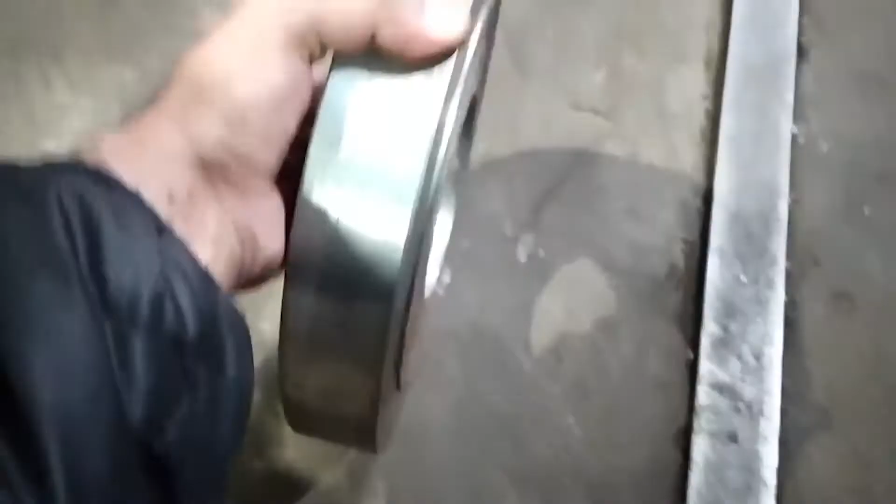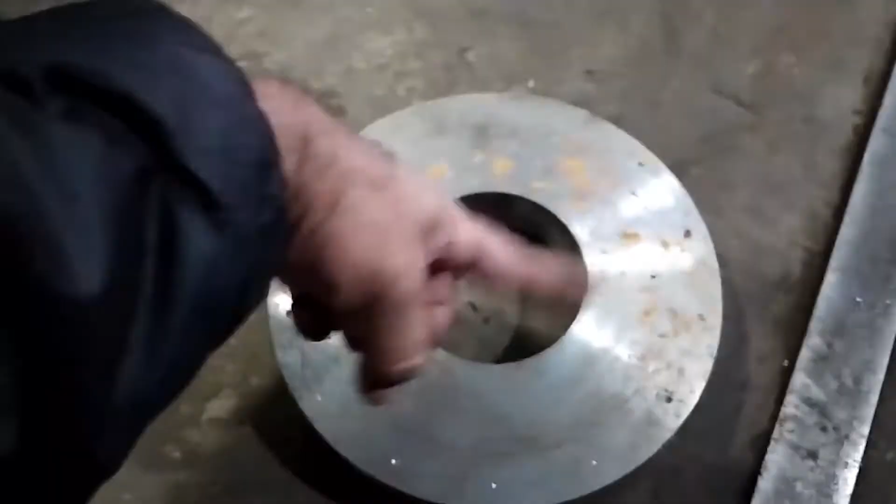Let me show you what type of job we are going to work with. This is a circular job, and we are going to perform center drill and area clearance operations inside of it. This is the thickness of our job, and I'm going to put this job on the bed.

After that, I'll show you how to produce G-M codes using CamWorks inside SolidWorks. I'll place this specimen like this, and let me show you inside the computer. This is the output we want from the VMC operation - at the center we are going to operate area clearance, and as you can see, I have already set machine, stock and coordinate.

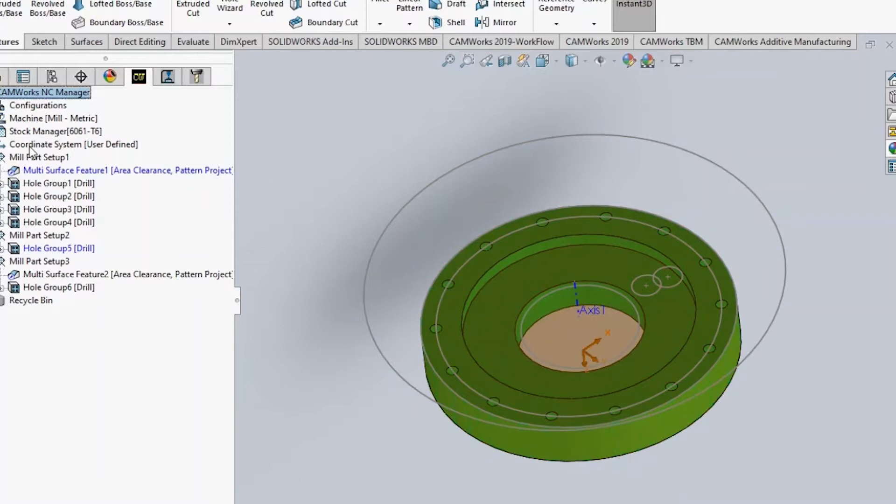If you have seen my previous video, you can check that video on how to do that. In order to create a mill part setup, you can go to CamWorks and setup, and this way you can create your mill part setup. In this area you can create your operations.

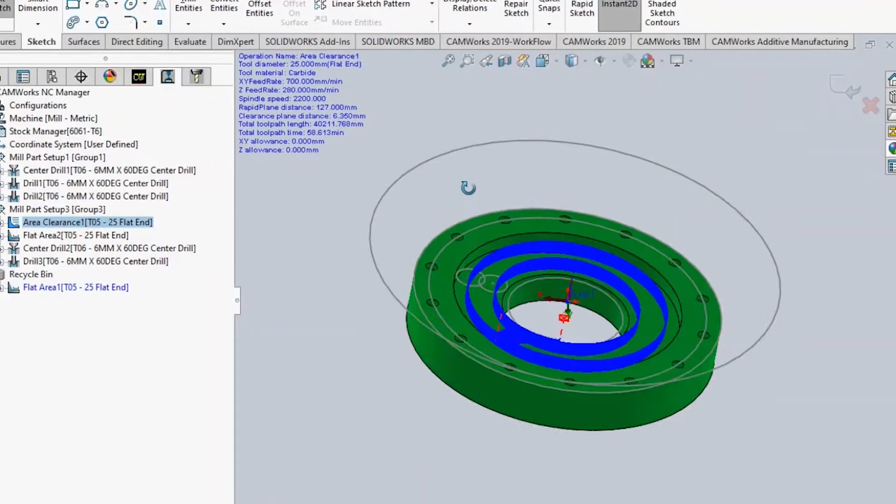Under mill part setup 3, as you can see, this is the area clearance, and we are blocking the tool from going inside this bore. Let me show you how we're going to do that by going to edit in the area clearance. Let me show you the settings that we are using.

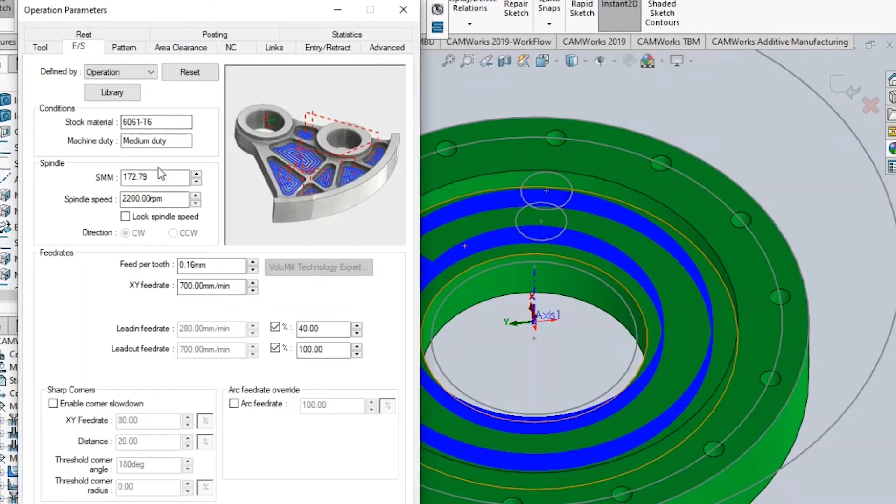This is the tool we are using to do area clearance. If you know all the parameters of your tool, you can enter that. Under feed speed, you can enter all this. Under pattern, I'm using pocket out, and this is the maximum and minimum step over.

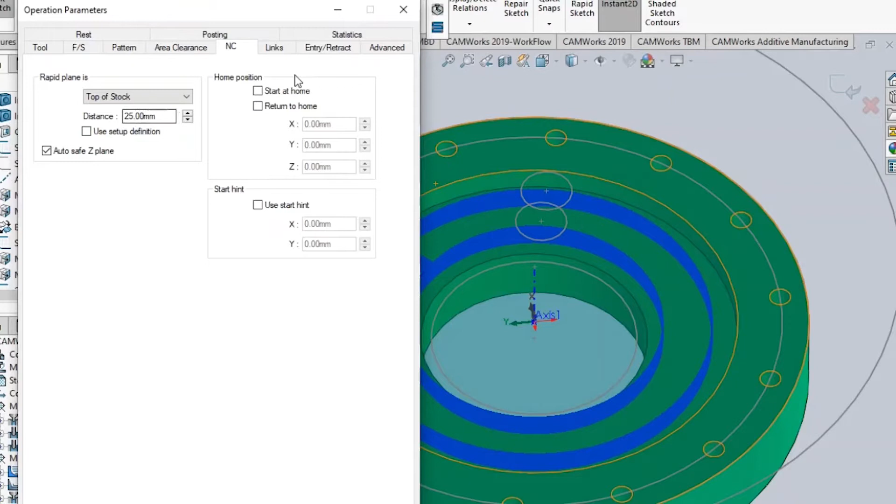Under area clearance, I'm going to use 0 because I have already moved the face up to which we want the clearance, so manually I'm not going to install any allowance. So 0.3 for cut, and for NC I'm using 25. These are the default values, to be honest with you guys.

So I'm going to use by level. Under the entry level, I'm going to use ramp, 1 and 2 degrees. That's all - I'm going to leave these values as they are.

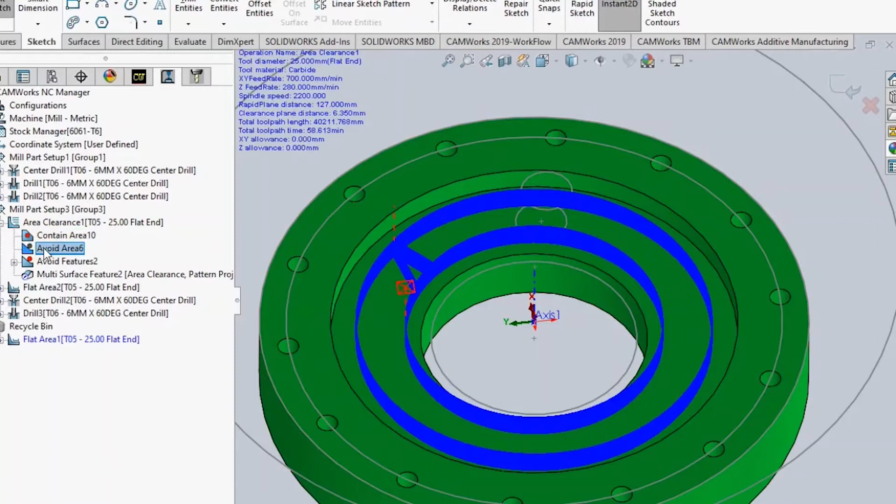Let me show you the contain area. The contain area is nothing but the area under which the tool is going to operate, and the tool is not going out of it.

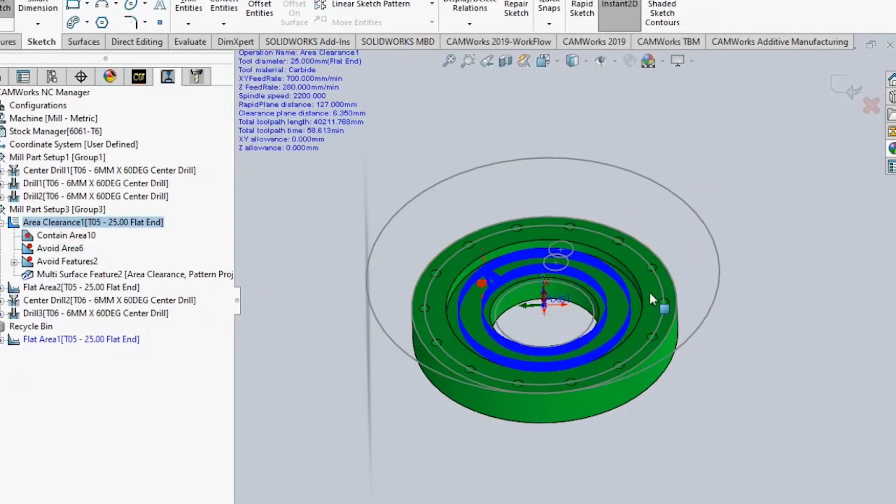So this is the contain area, and now is the time to show you the avoid area. The avoid area is the area in which the tool is not going to enter, no matter what. This is how I get a result like this.

Let me show you the center drill operation over here. This is the center drill I'm going to use. Let me show you the settings I'm using for this operation.

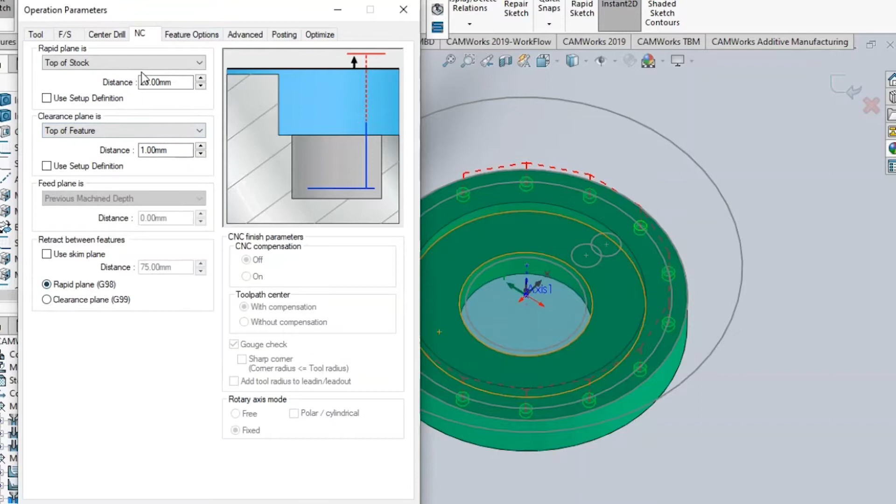Under feed speed and under center drill, I'm using spot drilling. So it's only one go, and everything is by default - I'm not changing anything over here, like this. I'm going to leave it as it is.

You can change the start point wherever you want. So after processing, you can get this. This is the drill operation, as you can see under the settings.

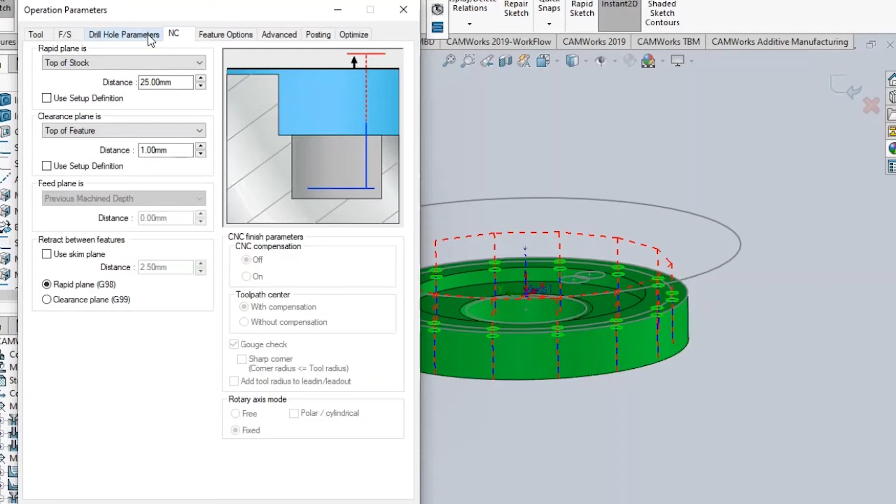Let me show you some changes. Under the peck setting, it is by default, I guess, 2 millimeter, and under the NC I'm going to leave everything. Let me change the value for you guys if you want to know how to change the peck value.

This is the Q value under the G-M code. This is the 3 millimeter peck I'm using, or the Q value. I'm going to leave everything as it is and click OK, then preview - and after previewing, everything is okay.

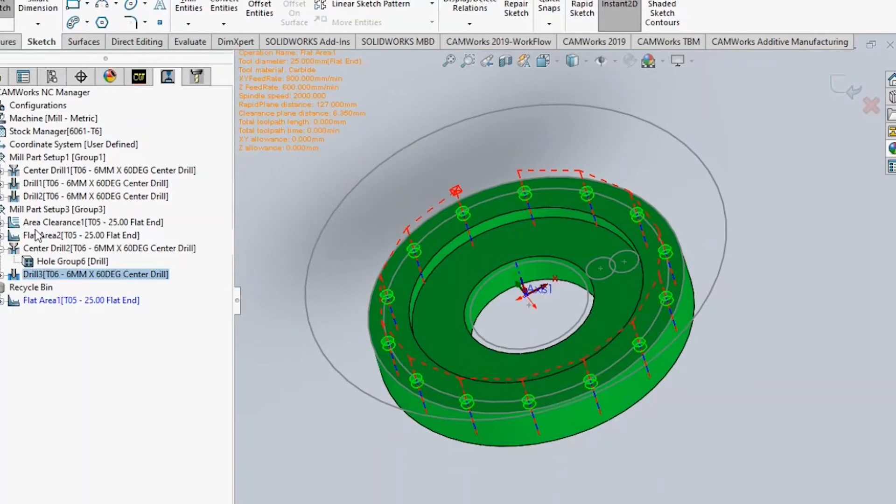Now right click, go to post process, and you can save your program wherever you want, and name your program according to the tool used and operation used on your job, in order to identify it at later stages.

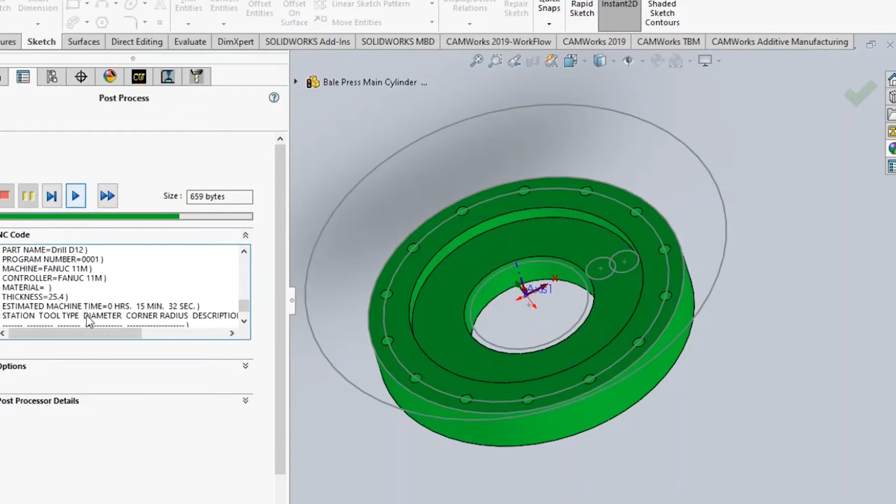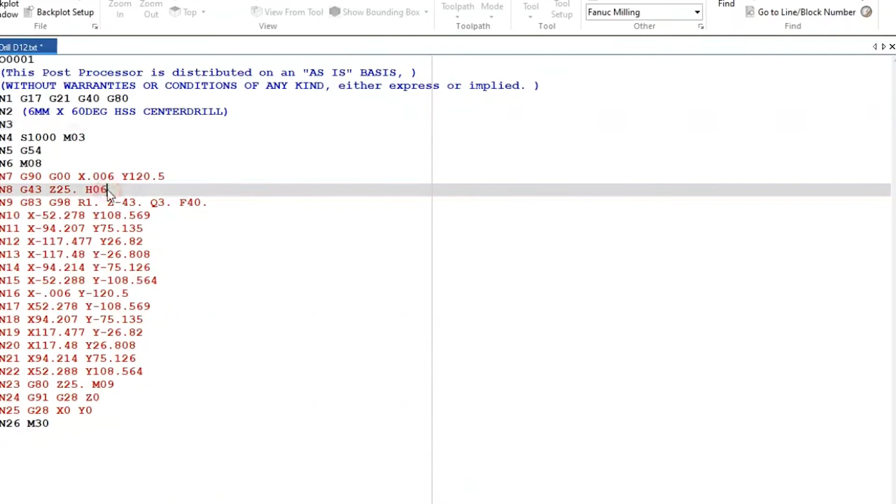Now you can click on play in order to generate the program and open it inside the NC editor. The GM codes are ready, and I'm going to bring these GM codes inside the machine using a pen drive.

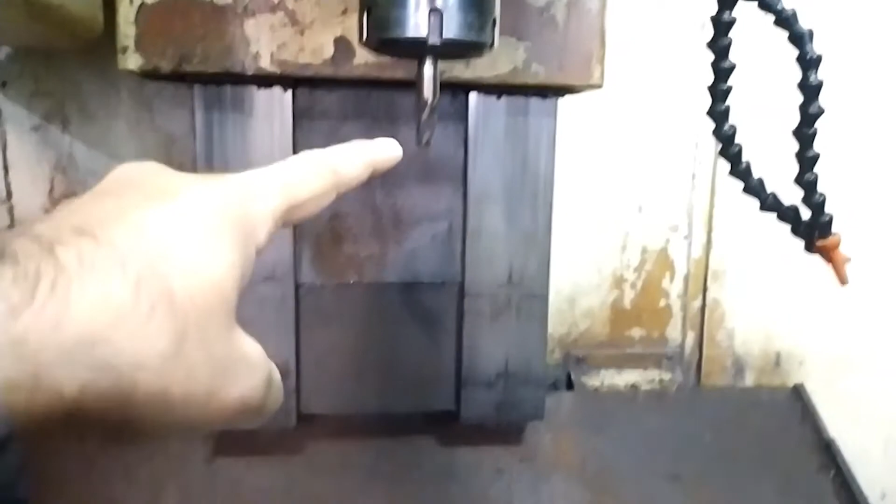So now is the time to go to the machine, and this is the end mill. With the help of this end mill, I'm going to touch in the X direction and half of it, then the Y direction and half of it, and in this way I'm getting the center of this circular job.

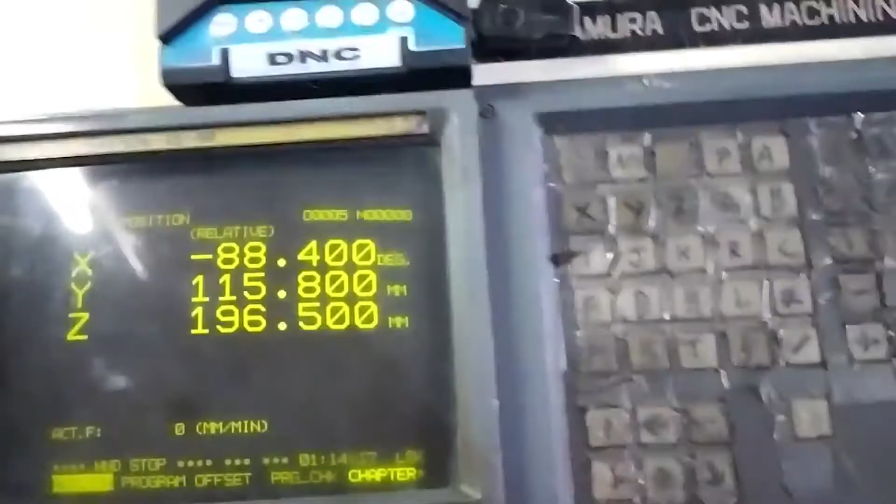Right now the mode is under handle, and I'm going to change this from handle to MDI. Under MDI, you can enter code to check some particular things. For this example, I'm using G0, G90, G54, then X0, Y0.

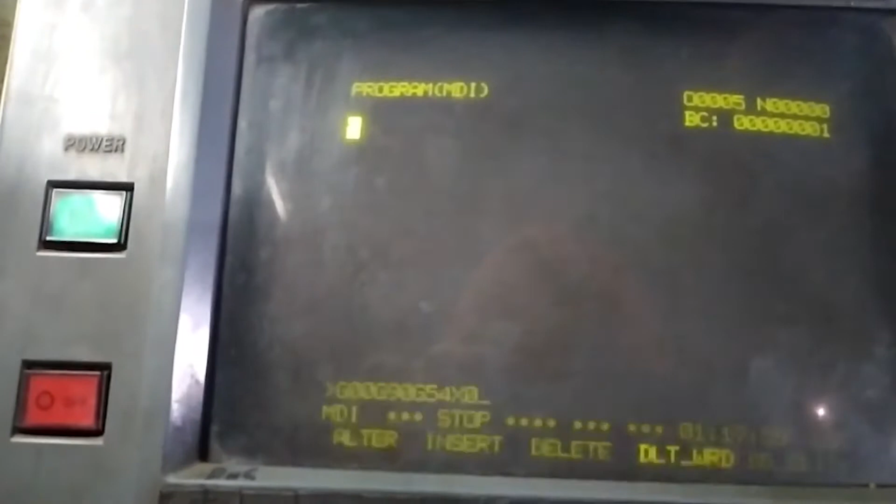So the code is entered, and all I need is to start the cycle, and this tool should go exactly at the center of this round object or circular object. As you can see, this is at the center of the circular object.

Let me just bring that tool down to make sure, or just to show you that this is at the middle of this job.

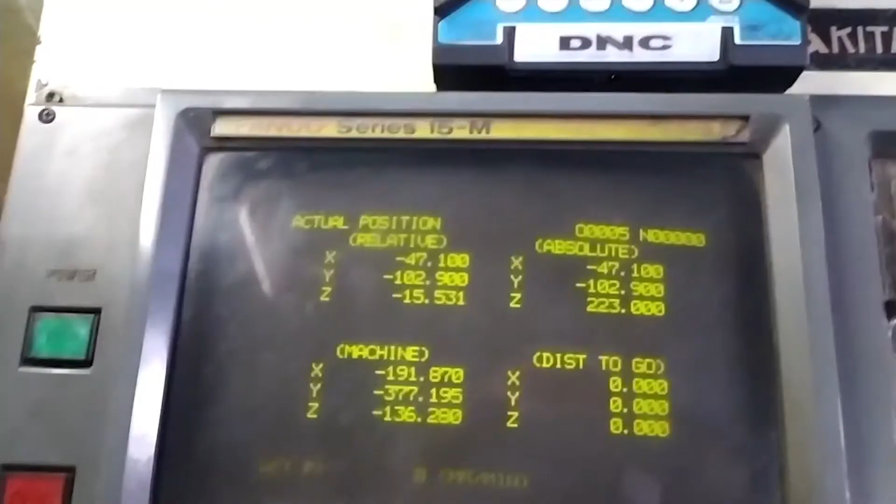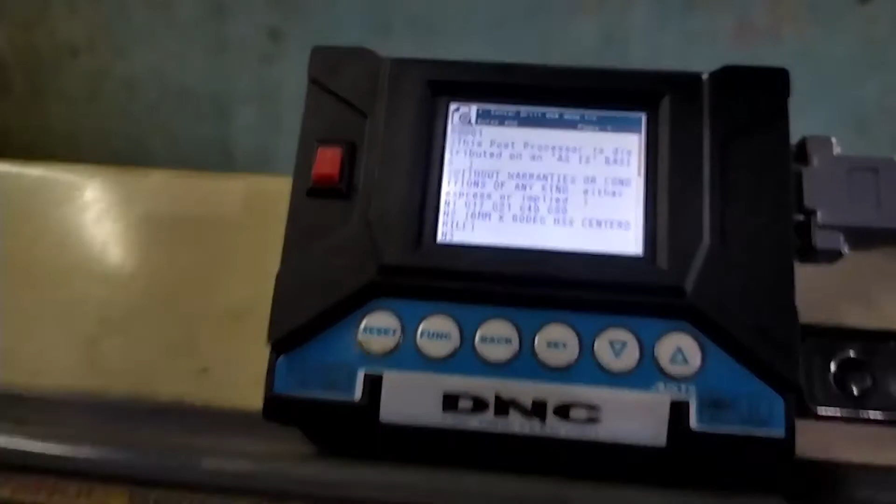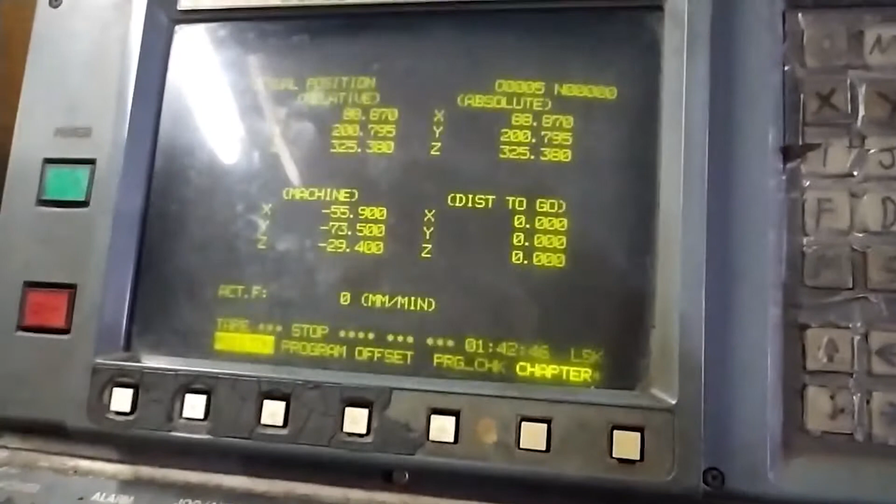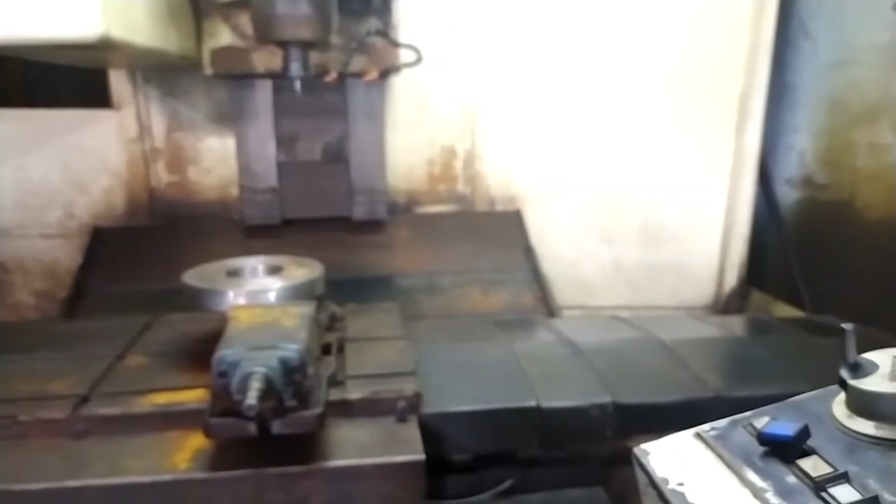So now the program is inside the pen drive, and I'm going to put this pen drive into the drip feeder, and the program is loaded. The tool is set, and this is currently on handle, and I'm going to make sure it is on tape. Everything is under control, and now all I need is to start the cycle, reset it, and start the cycle, and it should work fine.

As you can see, the center drill is on its position, so the operations are going very well.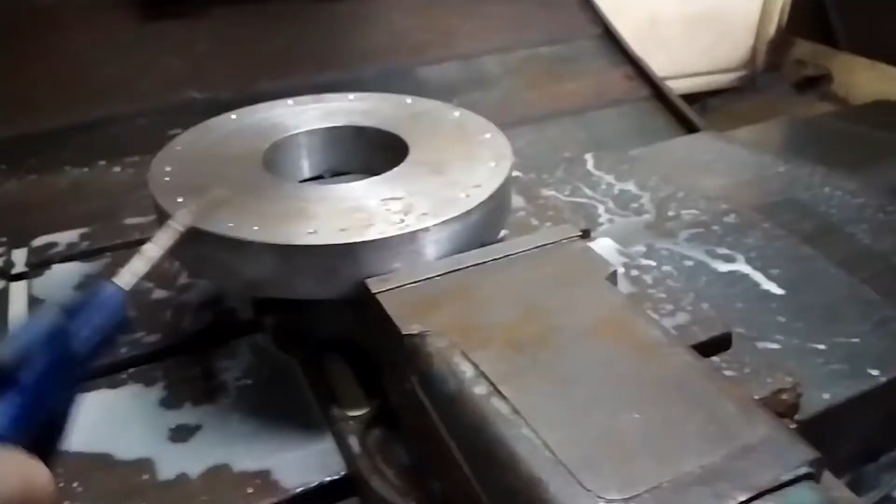After the center drill operation, I'm going to use the drill operation. As you can see, the operation is almost done. Now it's complete, and let me just show you here. These are the center marks I have over on this circular shape.

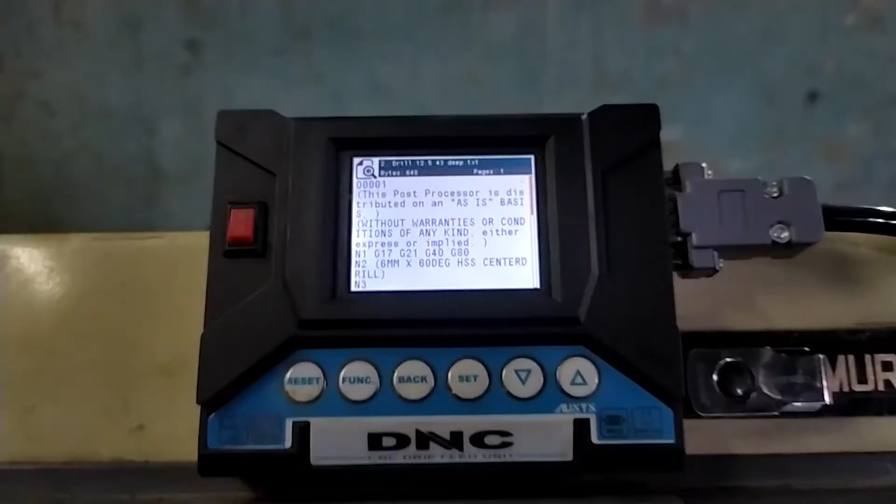So now is the time to show you how to drill, and the program is loaded. I'm on tape, machine is on tape, and now all I need is to start the cycle. So the drill is running.

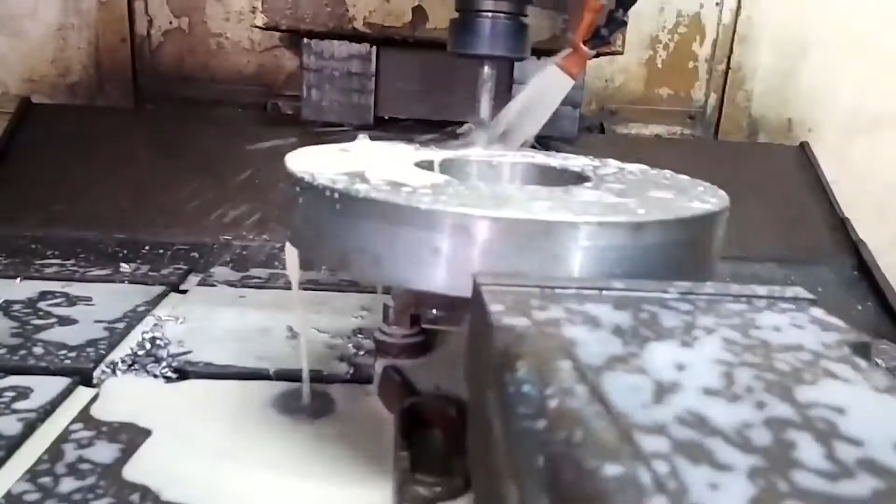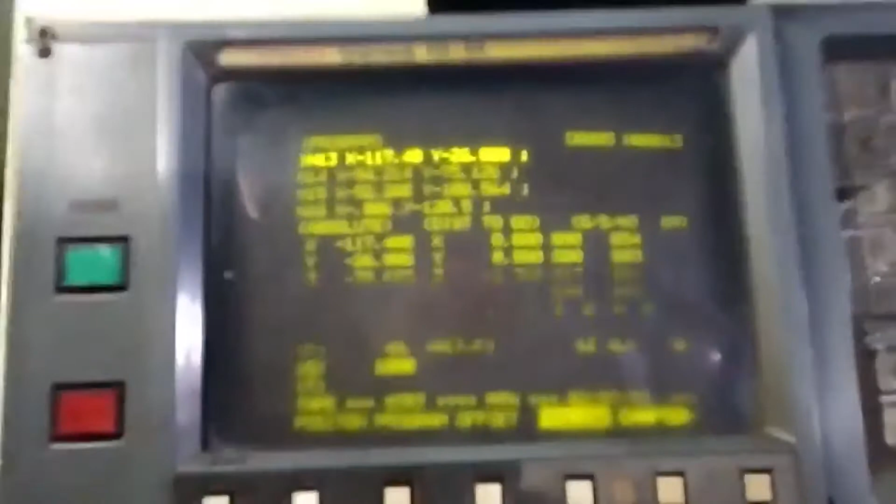I will show you after completion of this drill process. After the completion, I'm going to use the 25mm end mill to clear the area at the center of this circular block. This is basically the roughing operation I'm going to use with this end mill at the center of this block.

So the tool is locked and on its position, and here you can see the program is loaded. The machine is currently on tape, which helps the drip feeder run, and everything is under control. All I need is to start the operation.

After the completion of this operation, I will show you the final result, how it looks like when the roughing operation is complete.

So you can see here, this is what exactly is happening on the VMC machine, this is the exact tool path followed by the tool here. You can see the surface area is being cleared the way we want.